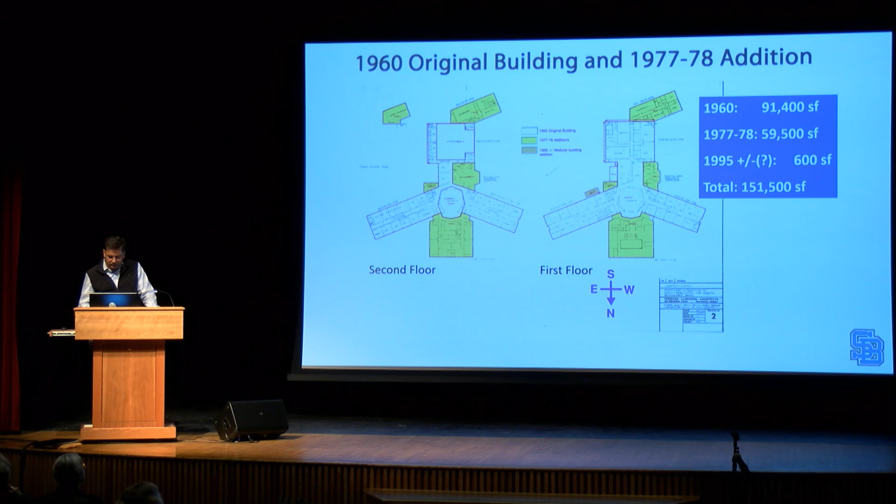Most of the infrastructure systems are expected to last 25 to 35 years, and both of these buildings are over 50. So taking a look at South Burlington High School, it's got about 151,000 square feet, originally built in 1960, had renovations and additions done in '77 and '78, and we've got about 942 students. The green areas are the additions that were added in '77 and '78, for a total of 151,000 square feet.

As part of this process, we brought through a team of architects and engineers - electrical, mechanical, structural, civil - walked through the site and the building inside and out, took photographs, documented the building, and put together a report. That report you'll find on the district website if anyone's interested. I'm just going to give a brief overview tonight because we've already given this presentation, but this is just to bring everybody up to speed.

Taking a look at the site quickly on the high school, one of the biggest issues is the impact of cars and pedestrians. Here you can see this is a significant issue for buses, parent drop-off, student drop-off, or student parking, and pedestrians.

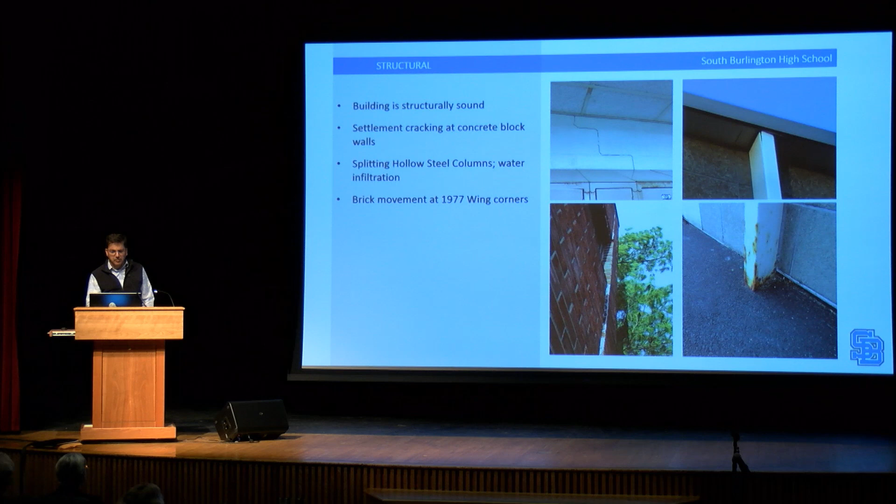Looking at the structural aspects of the building, it's very structurally sound. However, there are areas that are showing its age. There's some brick movement and cracking, and some rusting around the building.

Mechanical systems - the boiler plant itself is about 22 years old, which is relatively young in relation to everything else. Most of the rest of the mechanical systems are original to the building.

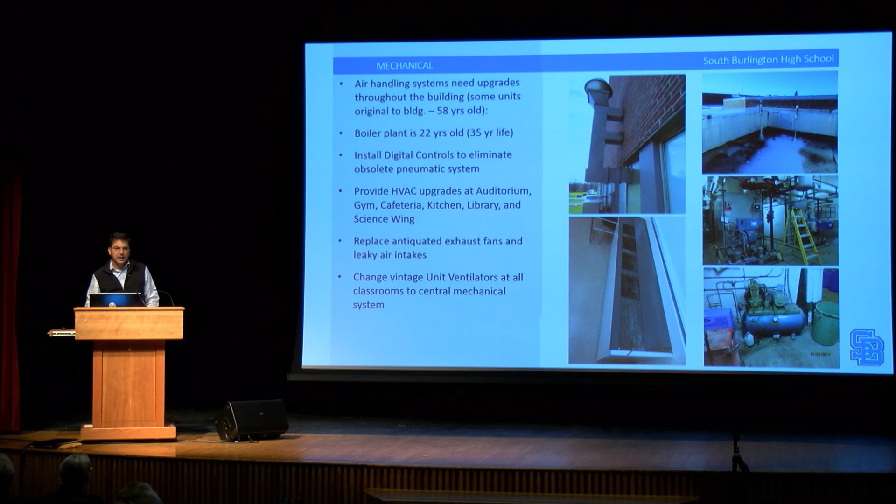The controls for the heating system, this lower right-hand picture, you can see this is a pneumatic compressor. So that is controlling the heating in the school. As you can see, it's antiquated. I think there's one guy in the state that knows how to repair them.

Plumbing and fire protection: in 1977, they added a sprinkler system, but they only added it for the additions. So the entire 1960 portion of the building does not have a sprinkler system.

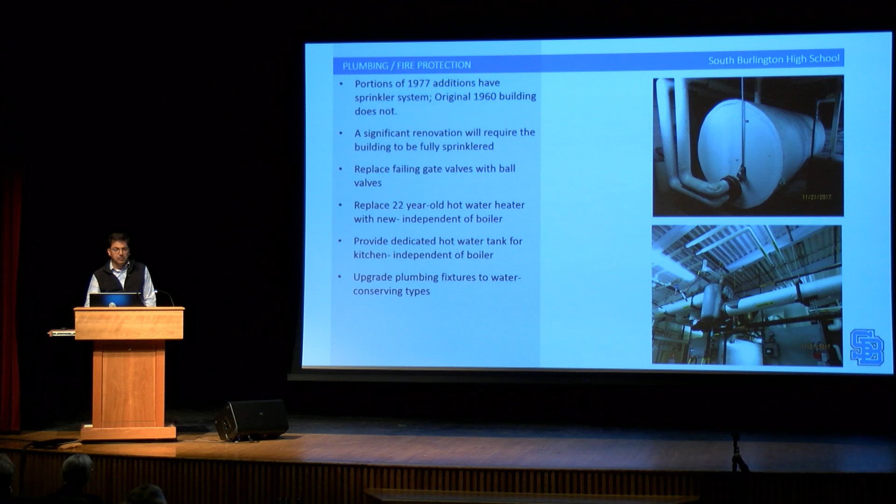Other items include this extremely large hot water storage tank. It's very inefficient, should be replaced. And all the plumbing fixtures should be updated for water conservation.

Taking a look at the exterior portion of the building, the roofs are in need of replacement. The school's been replacing small segments at a time, but there are large areas that are still in need of replacement. Back in the 60s, these were designed as flat roofs, so there's significant ponding.

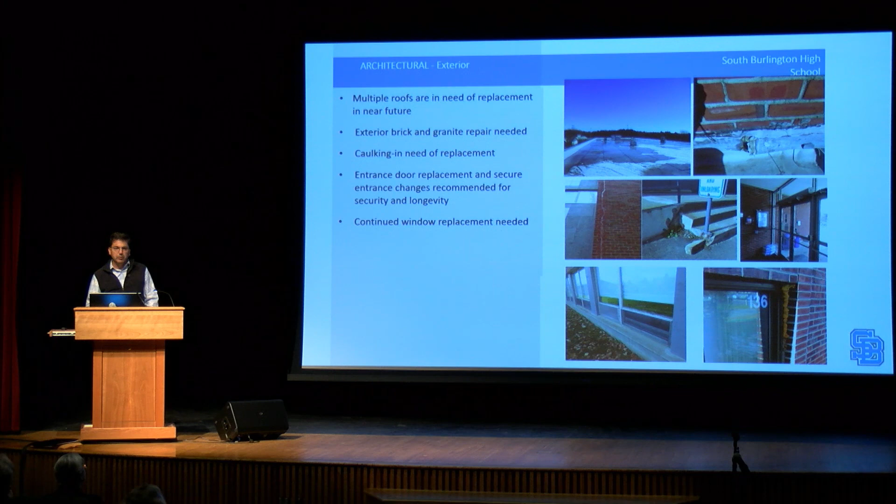Many of the windows have been replaced, but there are also many more windows that are still in need of replacement.

Going to the interior, as you can see, much of the flooring is all original. We've got concerns with handicap accessibility throughout the building, from here in the auditorium to the band room, toilet rooms, the lab casework, and the science labs are all original.

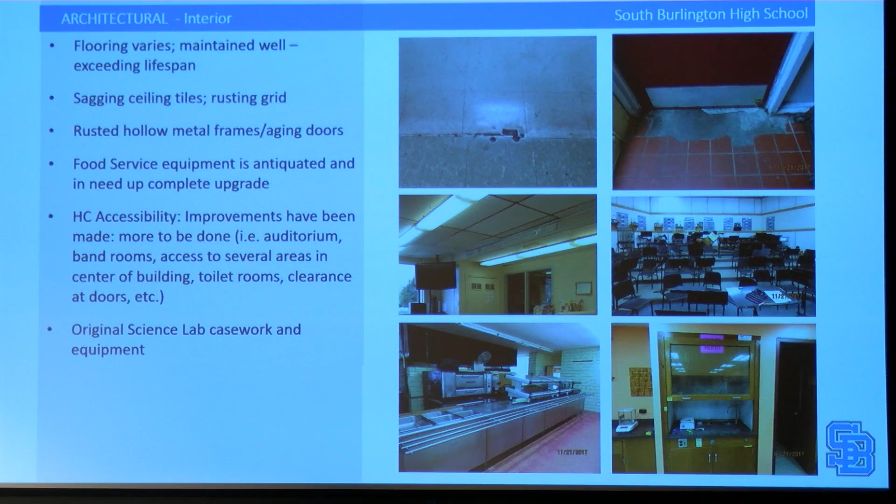Moving on to the Tuttle Middle School, it's about 120,000 square feet, built in 1967. There have not been any additions or significant renovations over the last 50 years.

And here also, there are site concerns in terms of safety for pedestrians. So we've got students and other people parking here, students traveling back and forth from the middle school to the high school, going across this parking lot, which a lot of times feels like a raceway. When cars come in here, they just come down and drop off or park. Then you have buses going around here as well. So you've got all this vehicular traffic, meanwhile students and other people are trying to cross over.

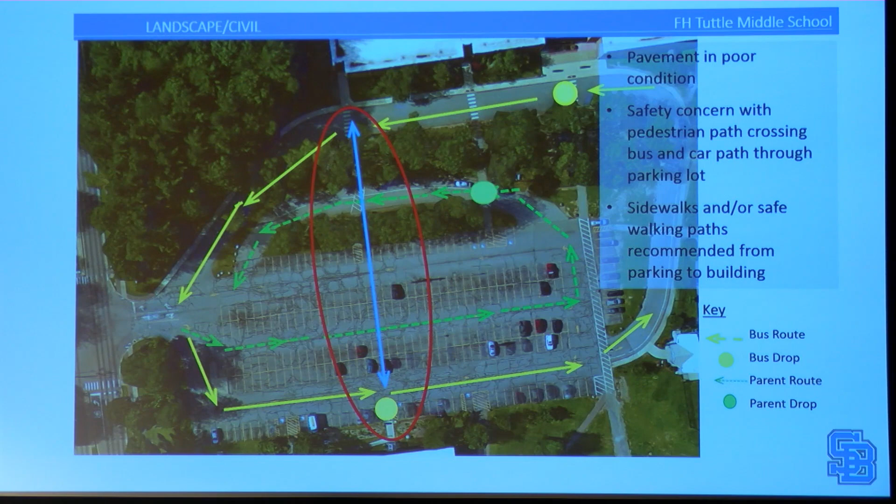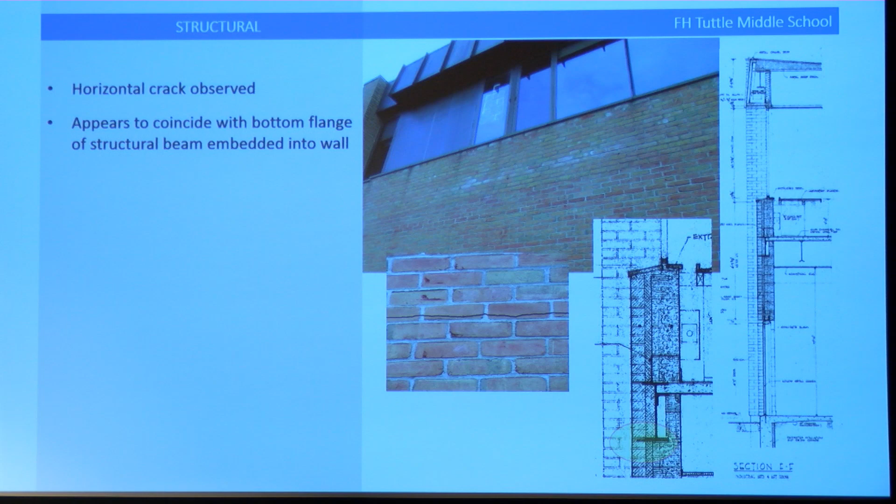Structurally, again, the building overall is very sound, but there are signs of age. There are a number of conditions like this one where there's horizontal cracking observed due to freeze-thaw action. A number of other cracks - nothing structurally significant to be concerned about, but it is showing its age, and there are areas that need repair.

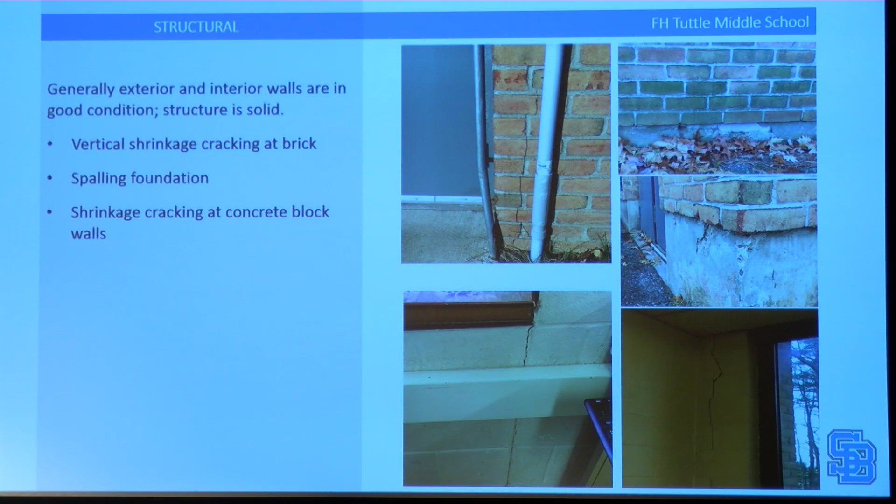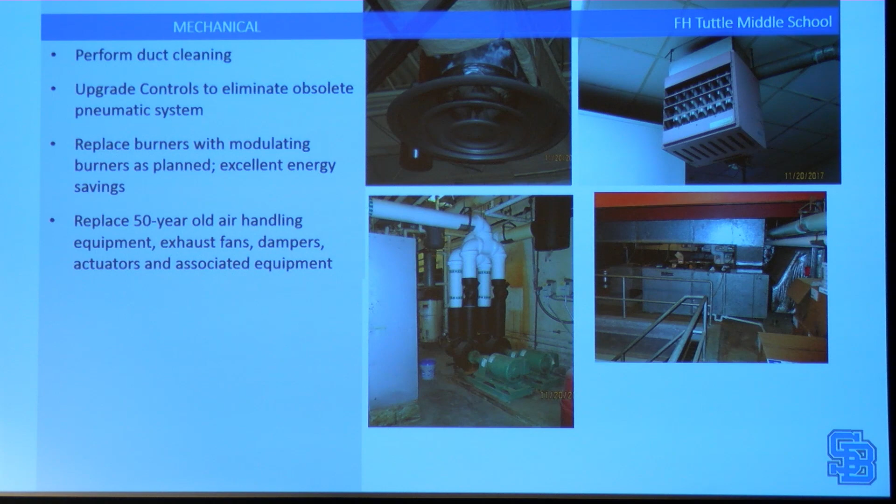Looking at the mechanical system, similar to the high school, many of the systems here are original vintage. Some parts and pieces have been replaced over the years as they have failed, but building-wide, it's in need of complete replacement.

Plumbing and fire protection: there's a limited area sprinkler system that serves the boiler room and the storage rooms, but the rest of the building is not sprinklered. And again, much of the plumbing systems are original.

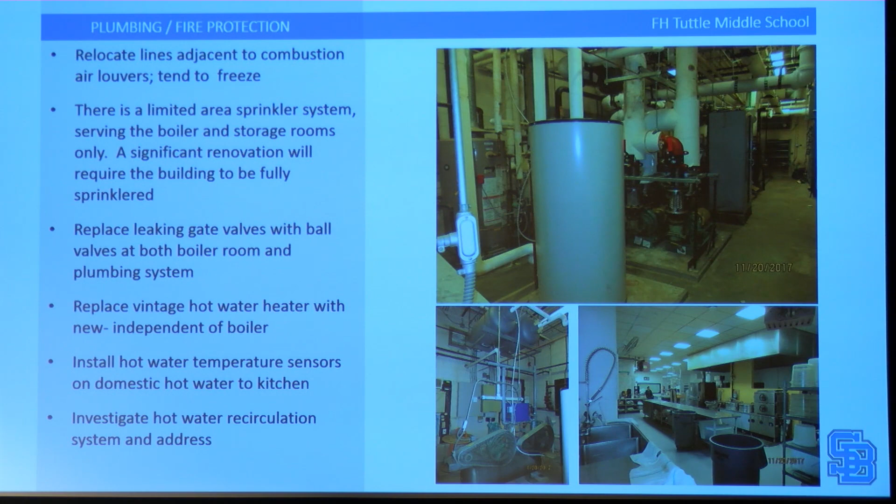Looking at the exterior, this roof is what's called an unreinforced PVC roof. It's way beyond its lifespan. There's some significant shrinkage and pulling away of the roof. You can see over here and over here where it's starting to crack the brick. So these are things that really are in need of upgrade and repair.

All the windows are original as well.

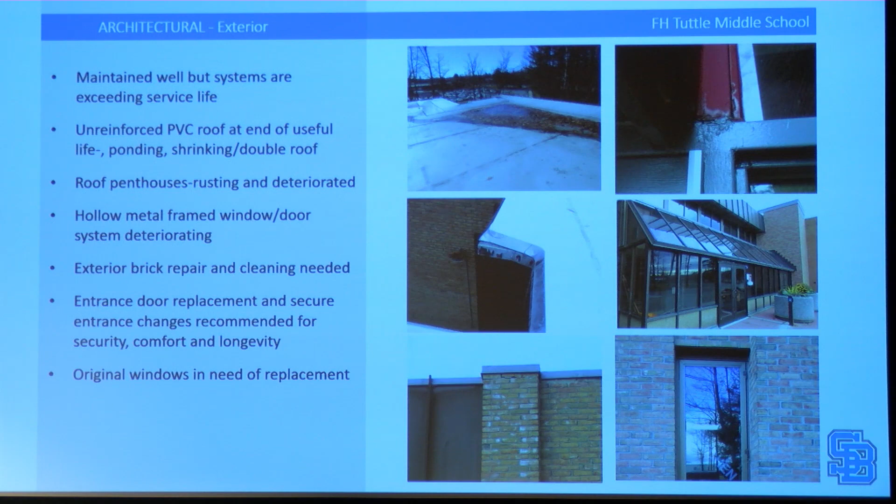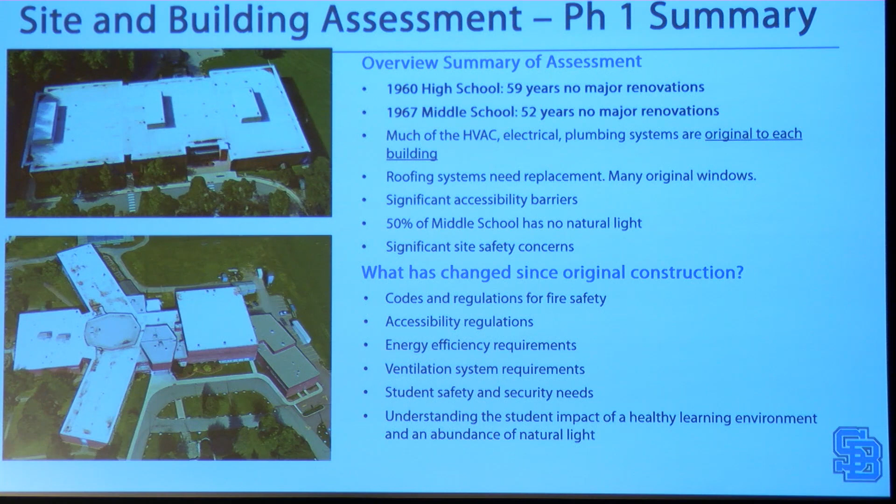So just giving a summary of this, the high school's just about 60 years old, middle school is 52. Much of the HVAC, electrical, plumbing systems are original. Roofing systems are in need of replacement. One thing I didn't touch on, which we will talk about a little bit later, is that 50% of the middle school does not have any natural light. It's a very wide building, and that has an impact on student learning.

And what has changed since the original construction: codes and regulations, accessibility, energy efficiency, ventilation, student safety, and just understanding the impact on a healthy learning environment.

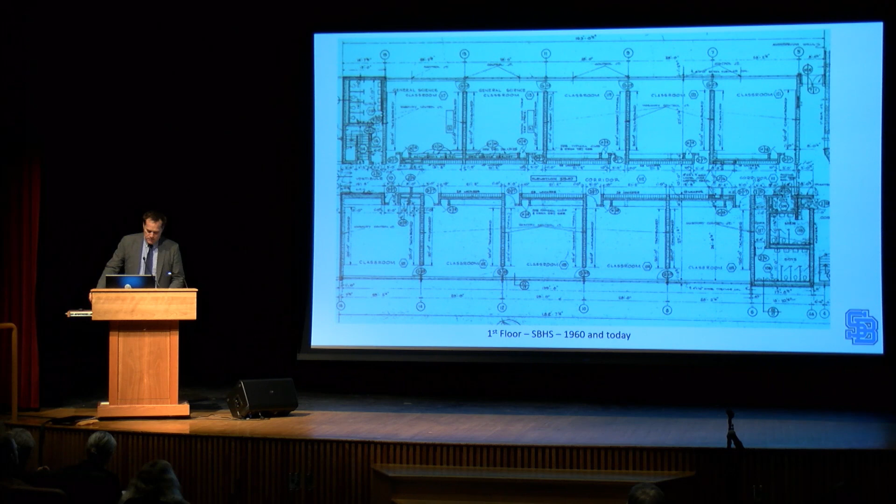The 19th and 20th century model of education was fairly simple. The teacher held all of the knowledge, and the students were like empty vessels to be filled with this knowledge. The teacher would stand at the front of the classroom and write at the chalkboard or lecture in order to impart this knowledge. The students would sit quietly in straight rows, receive the information, and try to record it in their notebooks so they could repeat it back on the day of the test, hopefully in the exact same way that the teacher presented it.

Today, two decades into the 21st century, we know that this approach is obsolete, even though we still work in buildings and classrooms from the industrial model. The skill of rote memorization, followed by regurgitation of information, is not enough for our students to be successful. So straight rows of desks with the teacher lecturing from the front is simply outdated.

Now that each of us can access nearly unlimited amounts of information from the phones in our pockets, what students can actually do with information has become much more important than simply receiving information and repeating it back on a test. We've also learned that for our students to be college and career ready, they need to be better collaborators and communicators. These are the skills that top colleges and employers keep telling us they're looking for.

These transferable skills will help our students successfully complete college, hopefully in 4 years, or as they move from career to career. These skills will also serve our students well, even as many current professions disappear, while automation and globalization reshape the workforce as we know it.

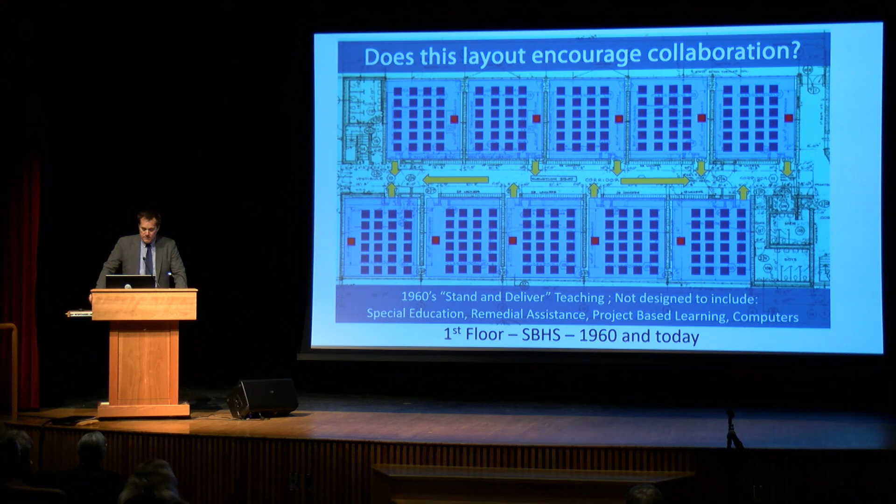Teachers and students are doing the best they can to make these shifts in learning and teaching, but our buildings don't lend themselves to this new curriculum. Whether we look at the design of our classrooms or our buildings, we're still literally operating within the box, with one-size-fits-all space limitations. We will soon be 20 years into the 21st century, but we're still working in spaces for a 19th century model of education.

We know today, based on the last 50 years of nationally recognized educational assessments and brain research, that each student is different in the way they learn, the way they think, and the way they perform best. Looking forward to the next 50 years, if we're to expect our students to compete with other students around the world in both college and the workplace, it is our responsibility to create an educational learning environment to support flexible, collaborative, inspiring spaces for students to learn.

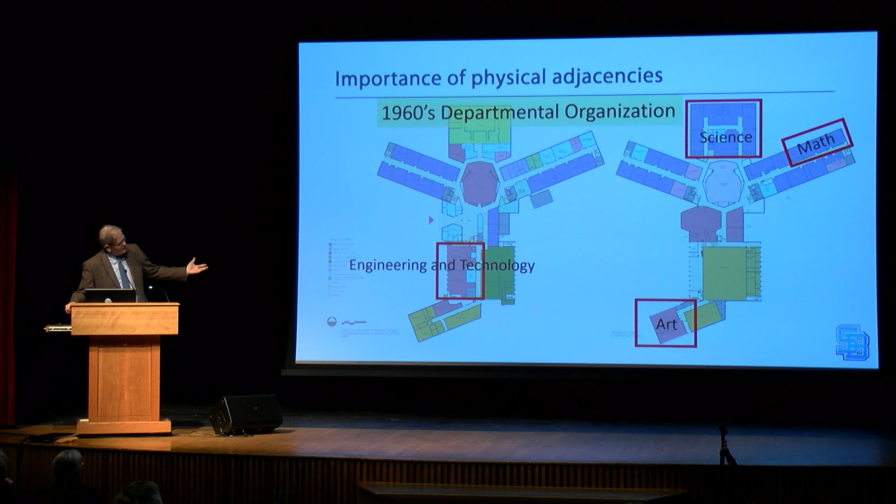That equipment is most often housed in the engineering and technology section. And so again, this is just a graphical representation of how disparate and spread out all of these are. Now this is an actual, you saw this slide before Mike Martin put up, this is actually our school.

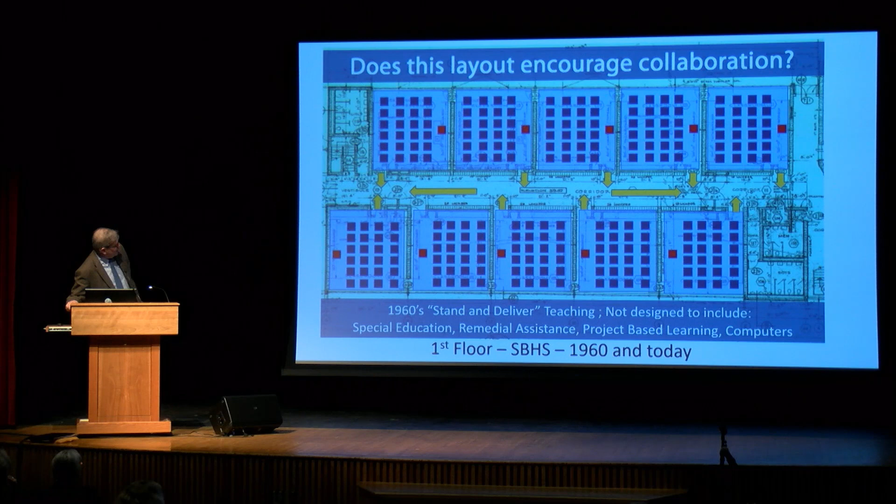These are like the original blueprints. And so this, I believe, is what the students will commonly refer to as the math wing, which of course, as you know, means we also teach science and health and history in that area. So, this is just a classic representation of those boxed classrooms. And so this is like what it could look like. And the ELA,

the shaded green areas, that represents extended learning areas. That's what ELA stands for there. And so there you see where you may have a couple of science classrooms, a couple of math classrooms that feed into these extended learning areas. So a teacher could very easily have students working with each other on a math science project, with students from another section or another class in that extended learning area. And also, we would continue to maintain that kind of passive supervision that I was talking about before.

There's actually a local example of this, and some of the slides that you've seen have been from the Shelburne Community School. I visited the Shelburne Community School last year, observing a teacher candidate for a position here at the high school. And so I saw it not only in the pictures, I saw it in action. And what they have been able to do is really create these very pliable spaces for their students.

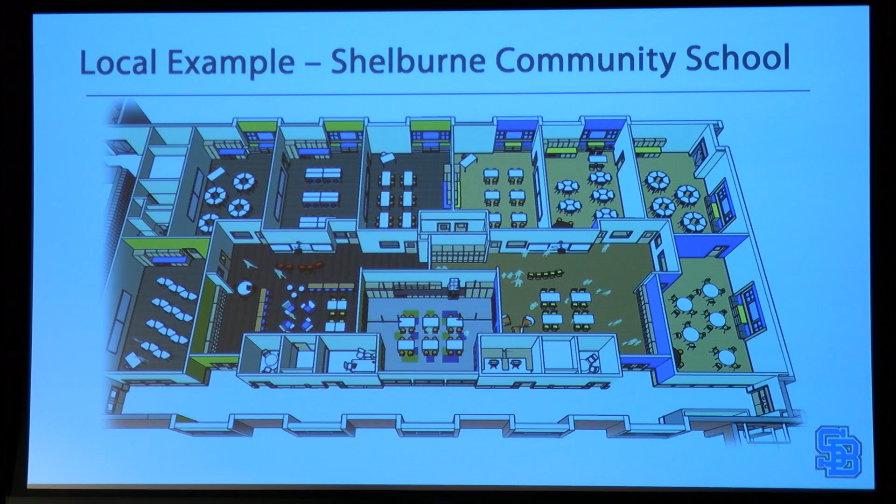So at times, you would see the teacher presenting some material, students kind of working in groups, then boom, they would go out into different parts of the wing or parts of their so-called house where they would be able to work independently or collaborate with others.

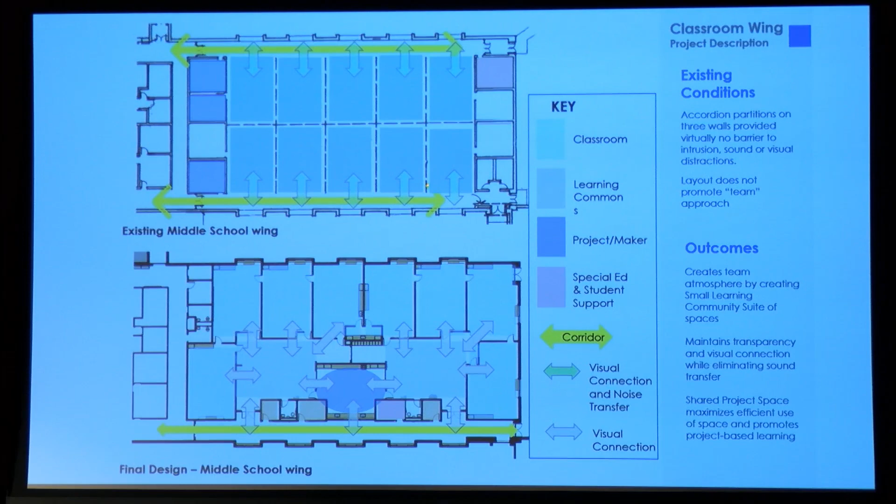This top depiction is the existing middle school wing, and so there you see it's kind of like your classic hallway down the outside, and then classrooms on the inside. And so you can imagine very little collaboration is happening in that environment. And then in this environment here, you have on the bottom, which is a

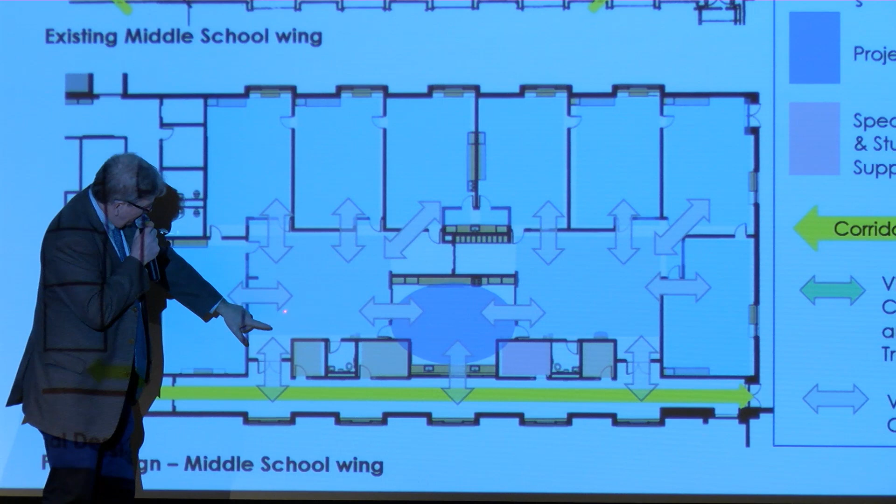design of a middle school wing. You see where students would walk in through this one area right here. So students would walk in, and now they're in this house area, and these classrooms can all be accessed from within this house, and then same thing over here. So if you can imagine a team setup, that's what

a better design or a more progressive design for what we are actually doing at the middle level in South Burlington.

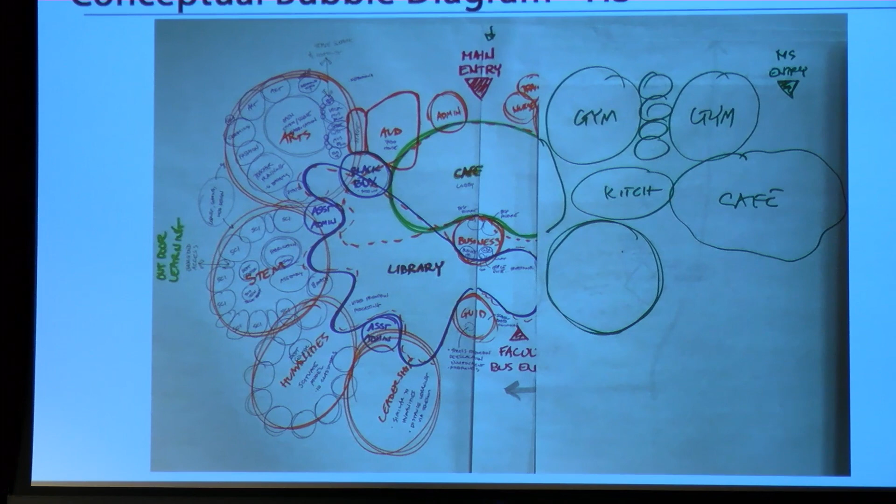It's not so much in teams, as we're kind of developing almost thematic academies where we're putting related programs close together. So we have an arts wing. We talked about STEM, science, technology, engineering, and math, trying to get those related programs closer together, a humanities section, and a leadership section. The library kind of looks like a glove, we want it spread out so that information source is available to all of those teams. A cafeteria kind of integrated into the heart of the school, something that doesn't look anything like we have today. We really want to deinstitutionalize that space.

So this is where we started from, and then we try and take these bubble diagrams and start translating this stuff into more conceptualized plans that I'm going to get into. And we have to figure out how to evaluate these plans.

So what the working group that was established for this phase 2 process, there's 7 categories that we're trying to match up these options to. Education, how well they serve the future education. Are the options student-centered, and are they going to support wellness and support the faculty and collaboration? Are we fixing the issues on site and circulation and separation of pedestrians and vehicles? Is there good community access? Sustainability - all of these buildings, when they're either renovated or new construction, we want to make sure they're energy efficient and healthy buildings for the occupants.

And we really needed to look at, and this is an important piece, if we were going to do something, how do we build these? And how do we keep the schools up and operational on the sites while we're doing that? And certainly cost is an important piece. How does that relate to all of these different options?

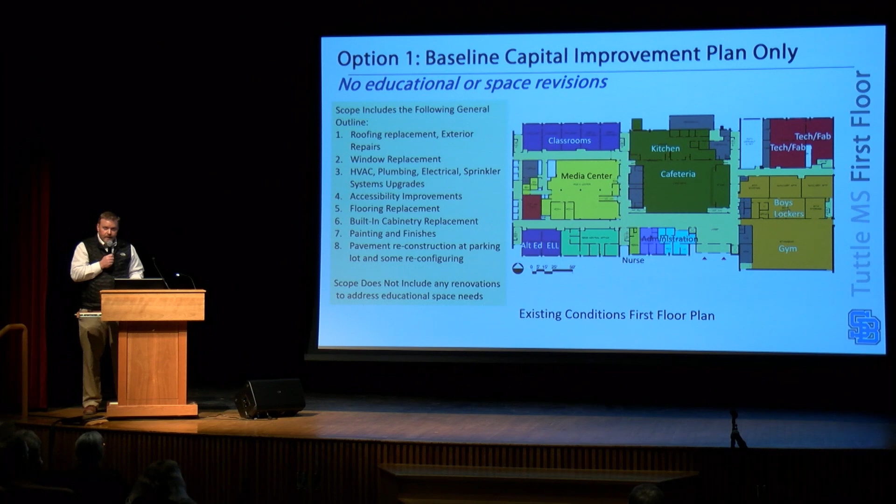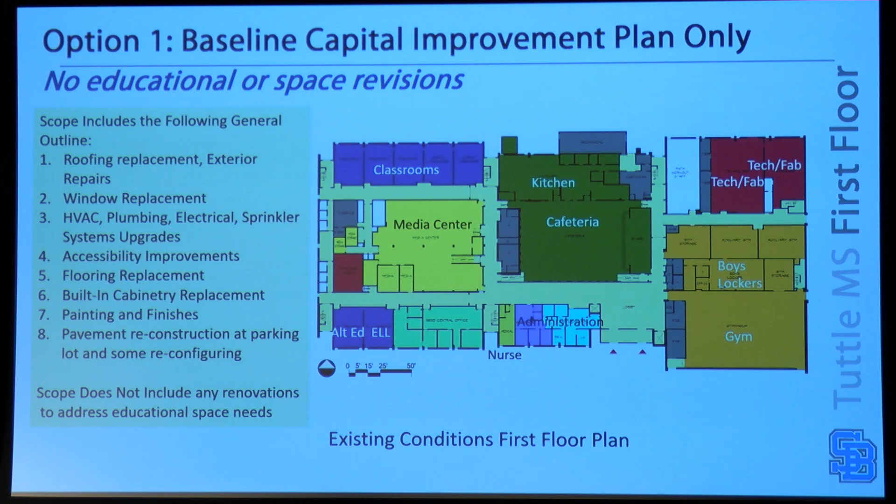So for the middle school, option 1 really addresses the phase 1 that we talked about. We're not making any educational improvements in option 1. This is just how do we extend the life of these buildings for the next 50 years. All of these options we're trying to show you right now are looking for 50-year solutions. So this identifies, I'm not going to go through this whole list, but all the things Rob talked about that needed to be replaced. And when we're all done, you're not going to see a lot of this stuff. You'll see new paint and new finishes, but all the infrastructure is really going to be behind the ceilings and the walls, and we're not moving any of the walls around to improve education.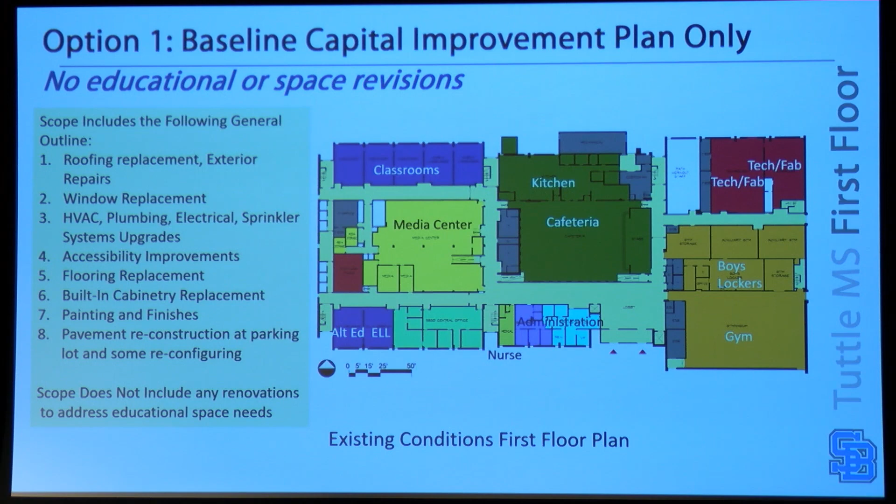This is the first floor. The second floor, very similar. Right now, science is all clustered together. Originally, this was designed as a junior high model, so it kind of looks like a small high school from the 60s. Classrooms are clustered together. Not all of them are the right size right now. Art is way over in the corner of the building. Band and chorus are separated, with locker rooms upstairs and downstairs for the gymnasium as well.

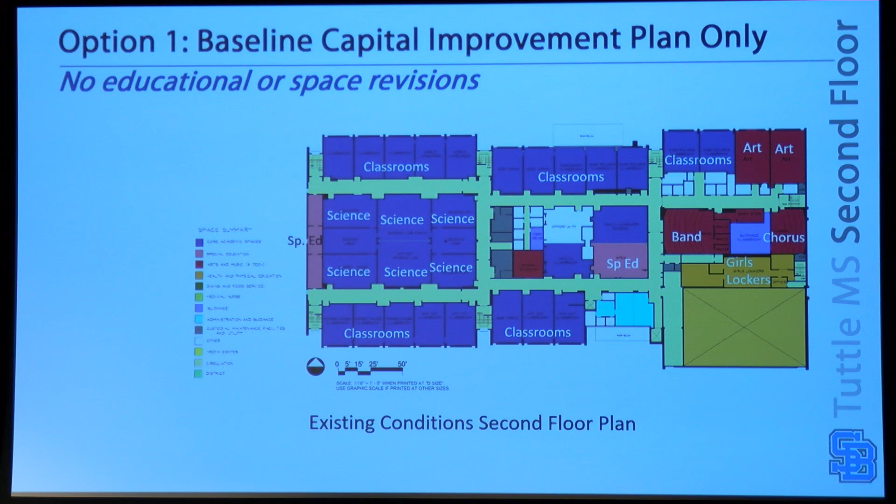How do we approach building something like this is really important, because we can't leave the students in the space while we're renovating it. There's no swing space foreseeable in the district where we can take 700 kids and move them somewhere for a couple of years. So we have to actually build this while the students are in the school.

This takes a long time, could take upwards of 3 years to complete. One of the big problems is that the money spent creating that portable village of classrooms, which has fire alarms, ADA access, heat, power, fire alarm and security systems, all that money drives away at the end of the project. So we really need to weigh the cost of temporary facilities that you don't get any benefit from. Is that a good, viable, long-term solution?

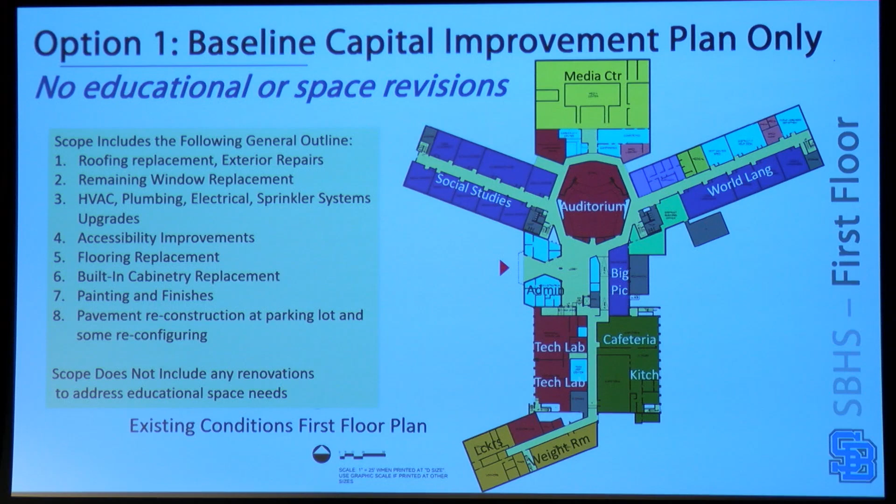At the high school, it's the same deal where we're just replacing the infrastructure issues. We're not changing the floor plan around at all. Again, we run into some of the same issues here. This is the second floor, keeping everything in the same place. It's still departmentally organized. How would we build something like this?

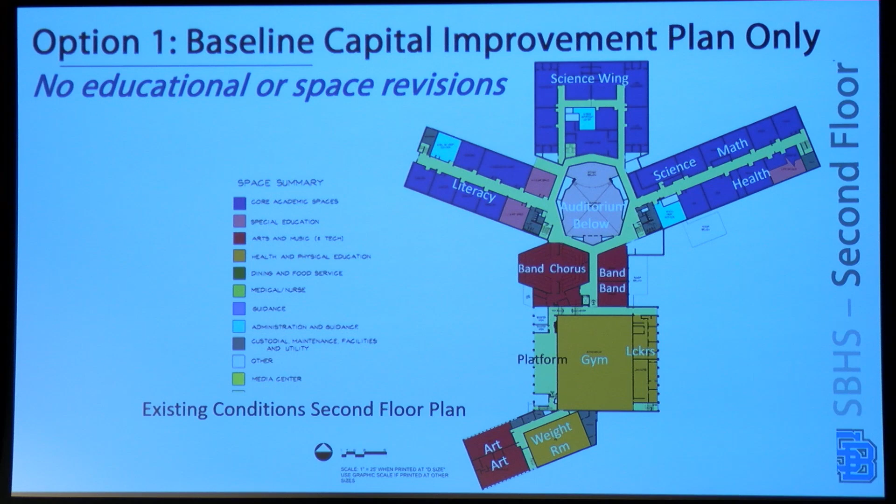Option 2, we take care of everything we just talked about in option 1. But what we wanted to do here was start to address some of the educational issues. This is a representative example. We chose the top 3 priorities at the middle school that were identified for us: the team's geography, the relation of the classrooms to one another, the cafeteria zones, trying to deinstitutionalize that space and make it more multifunctional, and there's a lack of gym space at the middle school. If you've been in there trying to watch a game, there's really no room outside of the court.

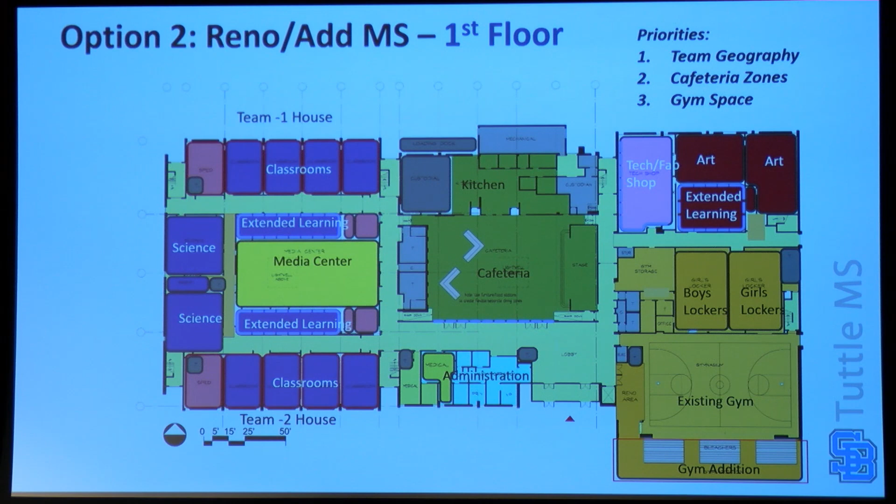On the second floor, you can see again you're starting to see some pretty good identity related to the teams, where we've got science and related classrooms for grades 6 through 8.

The science block that was here, you can see that we've blown that apart. There's that opening in the roof to try and get light down to the media center, and also to these extended learning areas around it. Same in the middle of the building, here's another light well trying to bring light in.

We renovate the band and chorus rooms. Right now they're separated by the guidance room, which we move across the hall, creating a health and wellness area with an extended learning center as well. Where we displaced the girls' locker room upstairs, we've added a movement studio as part of the program.

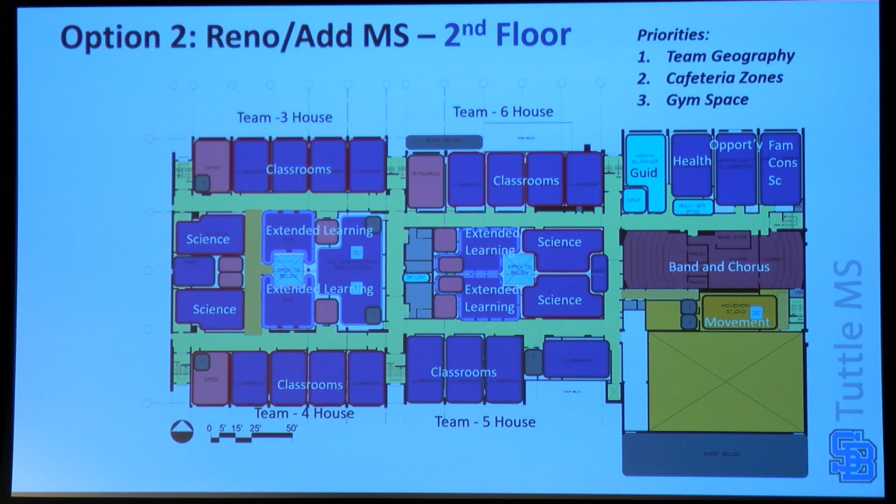So this is taking a longer step into solving some of those educational issues, but it certainly isn't solving all of them. We have the same issues because we're not creating a lot of new space to move students into.

We're going to run through the similar scenario for phasing. Again, it's building those portable classrooms and rotating students through, and this one is a 2 to 3 year construction project.

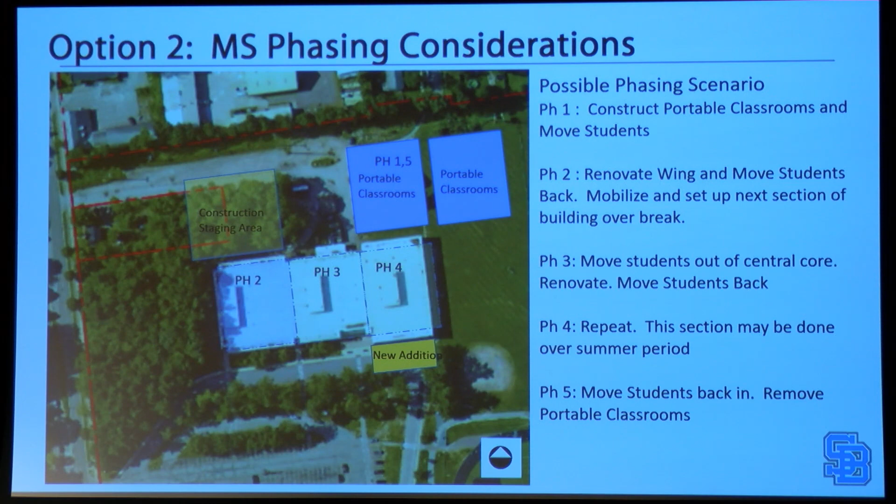The science department needs a complete overhaul. It's something that's been cited in the NEASC reports as well. And gym space is inadequate, we need more square footage to support the current programs.

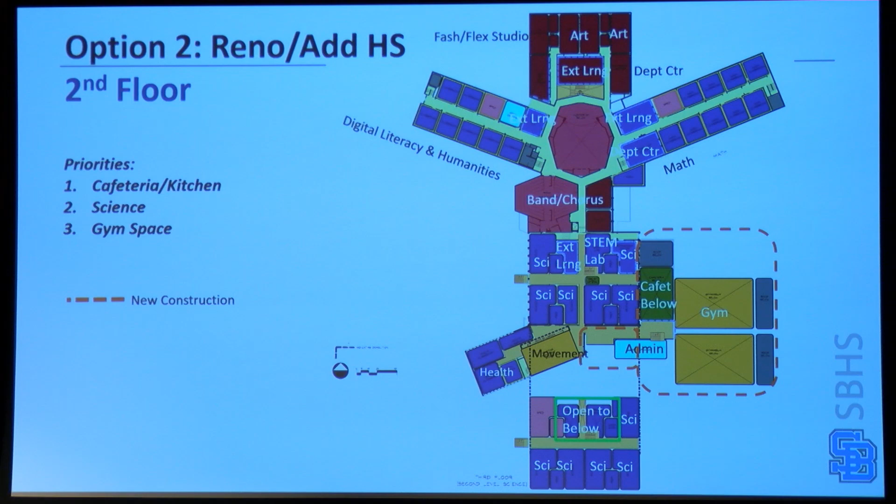From a site planning perspective, this is a different picture on the site circulation than what we have now. Here is the main entrance, now on the south side of the building, Kennedy Drive, Dorset Street to orient us. The old football field has been turned into parking.

We've closed off one of the curb cuts here, so we come in from a bus drop-off standpoint. Buses come in, they loop around, drop off at the front door, and then they can loop around and continue without going back onto Dorset Street, which they have to now, and come within the campus to drop students off over at the middle school.

Rob had mentioned what happens in the existing parking lot, because it's actually oriented 90 degrees from what we're showing right now, and it's almost like a speedway drive-through. So we've tried to slow people down, and we've changed the orientation of the parking lot.

Parent drop-off is just coming through where the light is. They circle around, drop off at the front, and they can come back out. So separation of buses, separation of cars. We've created some access for pedestrians to go back and forth because we know how much they do that. And this satisfies Pat's paving the north parking lot question.

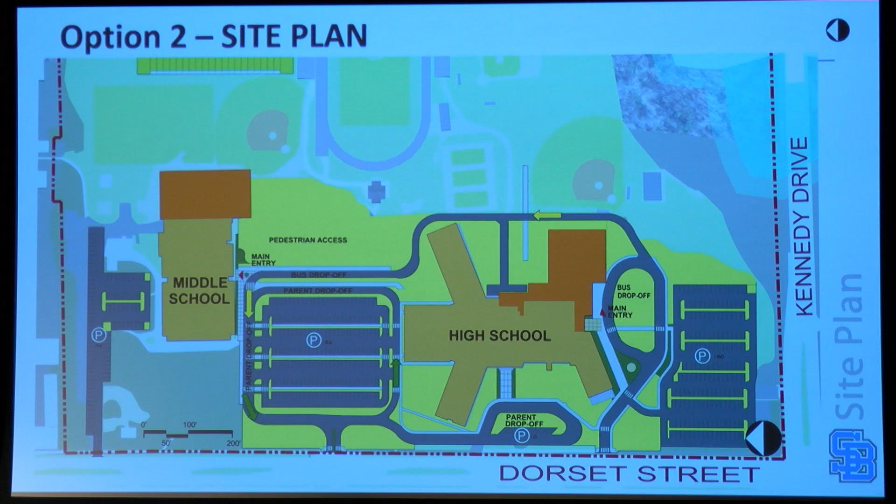Option 3, we're even going to go further. In option 3, we're trying to address as many of the educational needs that we identified in phase 2 as we could. And again, this is a renovation addition project.

The differences here, we'll start, this line right here is where the existing entrance to the gym is. What we're proposing is to take that gym completely down and replace it with a new addition that has larger gym spaces and a related performing arts space that has access, so you can have band, being able to have practice in a performance space here.

The cafeteria floor plan is rearranged a little bit. There's a large platform that also has access both to the cafeteria and to the gym, depending on what type of function is happening. The big change here is we're really trying to envelop the lower floor with natural light. So we've created some large openings here.

This is called a Hellerup stair, and I'll show you a picture of what that looks like. But basically, it's stair paths on both ends, and in the middle, it's tiered seating that goes down. And we're finding, because we've done a lot of these now, that it's a really good way to deinstitutionalize the space and provide many different opportunities for students in an eating environment.

And also from a teaching and learning perspective, it becomes a multifunctional space. You can have large group presentations in there.

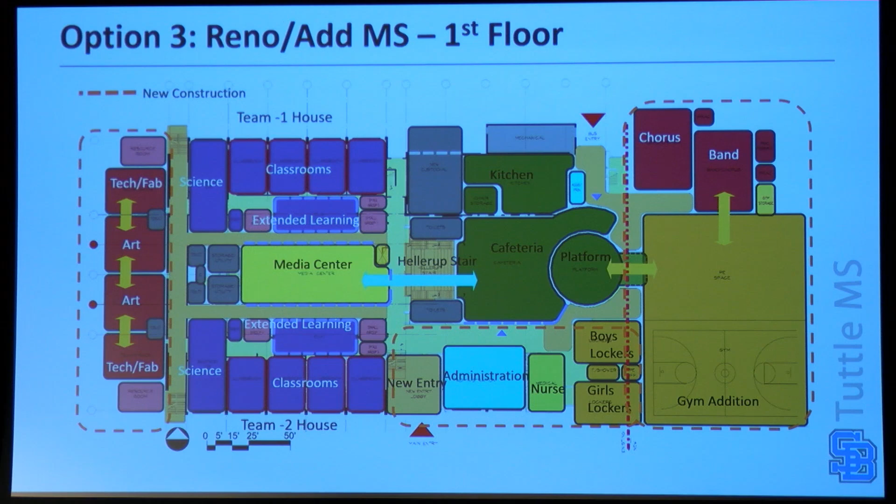When we go up to the second floor, you can see what we've done is we've actually taken away all the square footage that is here. So this would be wide open to skylights that are up on the roof. So it's bringing all natural light down that whole area of the media center.

And we're doing the same over here on the cafeteria, so it becomes a 2-story space. It's going to get lots of light and solve that problem of getting light deeper into the building.

Again, classrooms are arranged the way we're looking to do it in the future. We've got related special education and breakout spaces, some rooms for moving some of the administration assistant principals up to the second floor so they're closer to the students and staff that they're serving.

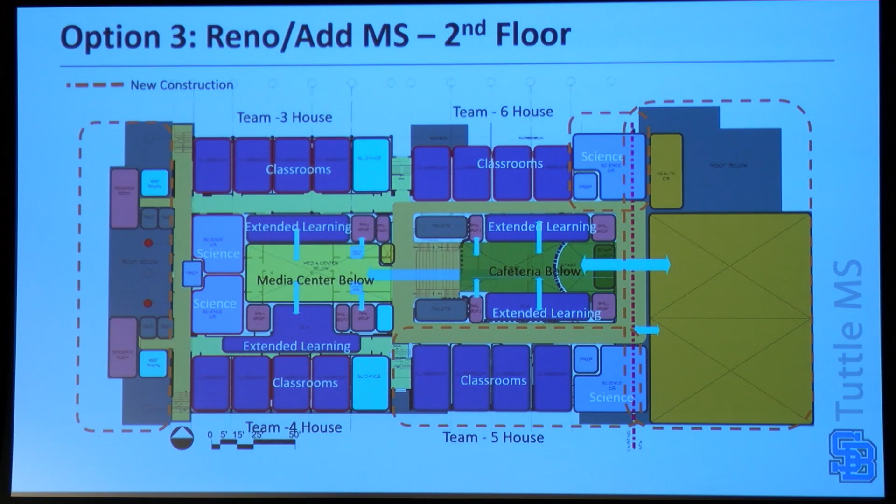At the high school, the renovation addition piece of this is a little bit bigger. So this is the existing front door. Basically, we're going to take right where the stairs are that you go up here off the lobby to go up to the gym. Everything south, we're proposing to take down. So this is all new construction in this area here. And what we're replacing is, you've seen the gyms here before.

We've got associated weight and movement studios, a kitchen and cafeteria, a black box theater. An auditorium is about twice the size of what we have right now. I think we're just under 400 seats, plus or minus, in here.

What we're proposing is an auditorium for 750 seats, with all of the related program spaces: a scene shop that has access to the stage, theater tech program, band and chorus also right next to where they'll be performing, some flexible studio space, and again we're separating a new entrance for drop-off of buses and where parents will be dropping off. We still have the same problem, because this is all existing building, of those undersized classrooms.

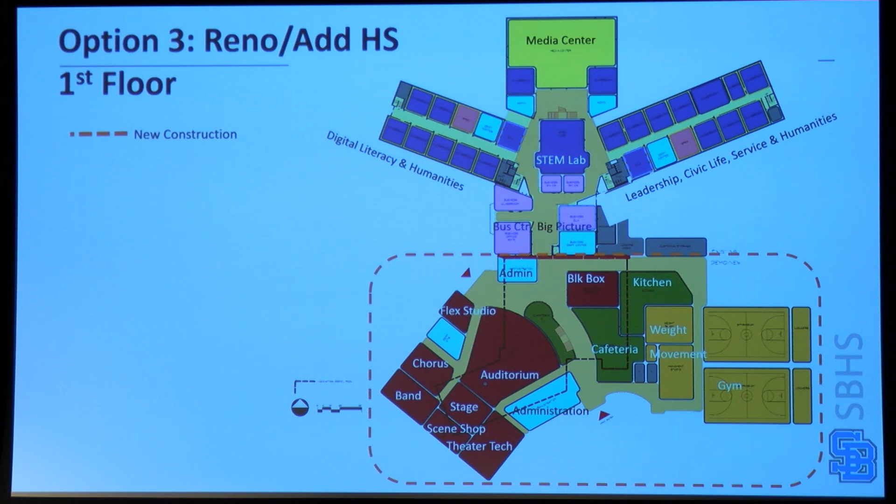The media center stays where it is. The auditorium, where we're standing right now, we actually flatten out this floor, and we poke holes in all of the outside places so you can actually see out and what's happening. This becomes a STEM lab or fab lab, and we saw some of those pictures earlier, where we're trying to integrate all of those places and provide project learning space for those related programs.

On the second floor, again, we are renovating the science wing. Where it is now, it's got extended learning areas, completely revamped science labs. We're getting related programs closer together, so you have math and science next to each other. This STEM lab is open to below, so when you're upstairs you can actually see what's happening on the floor level. Health program together, and again we've got art on the upstairs floor, kind of where the performing arts is, and these have overlooks down to the cafeteria and the black box theater below.

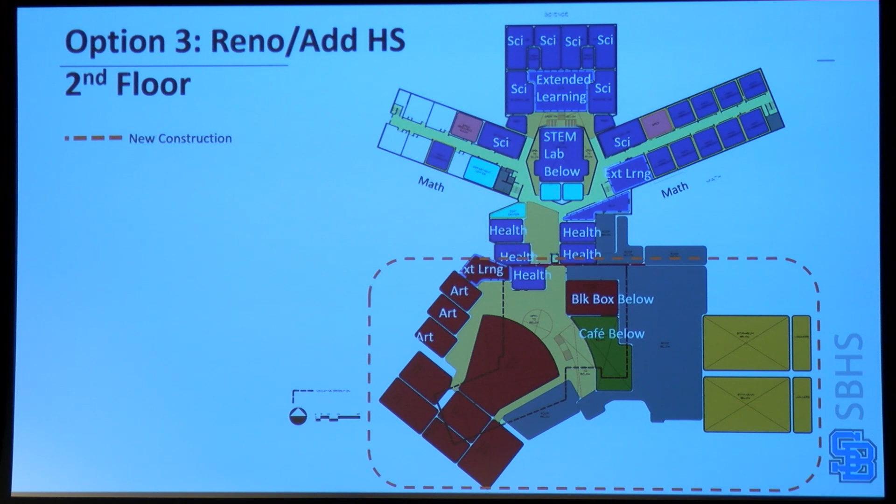What this looks like on site planning is pretty similar. Obviously the additions are a little bit different. There's additions here at the middle school for the arts, and here's the gym addition. The high school, it's a much larger addition, but the orientation of the circulation is pretty similar to what I just showed you.

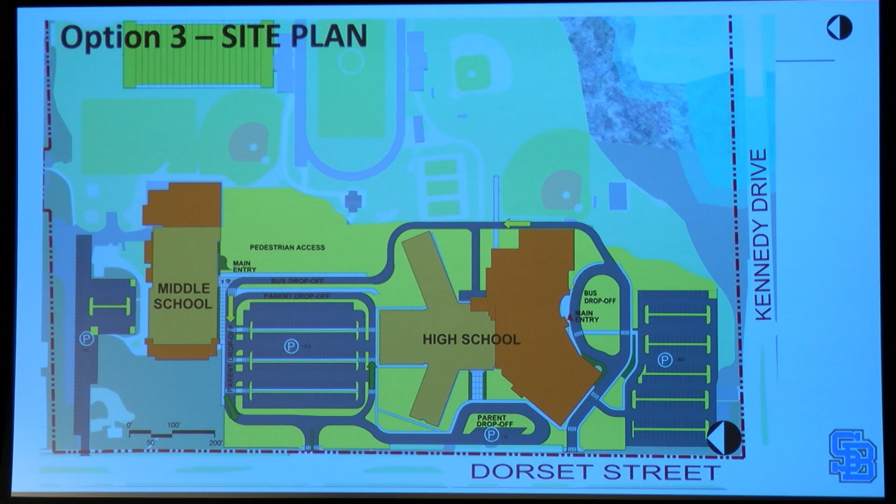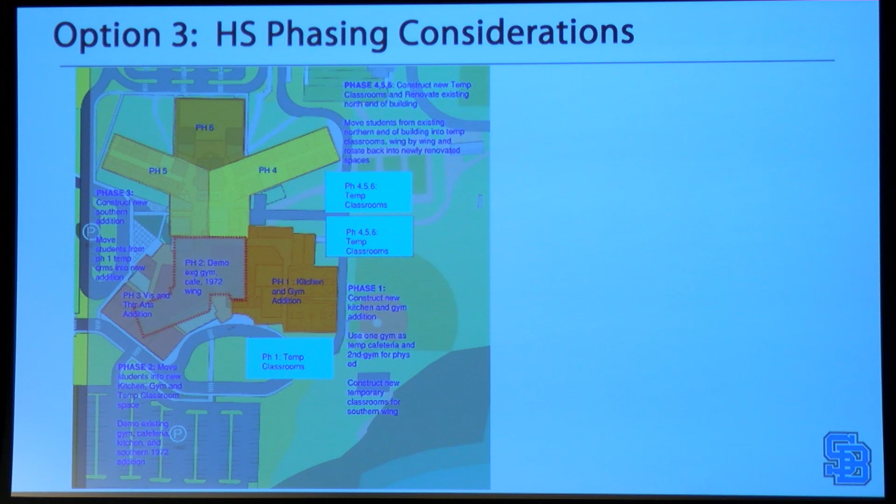Option 4 is basically what I showed you, but one of the questions that was asked is if there was ever consideration of having to move the 5th grade up, so it became a 5-8 middle school, how could you accomplish that? Could you fit it on the site, and could you tie it in with the 6th through 8 program I just showed you in a previous option?

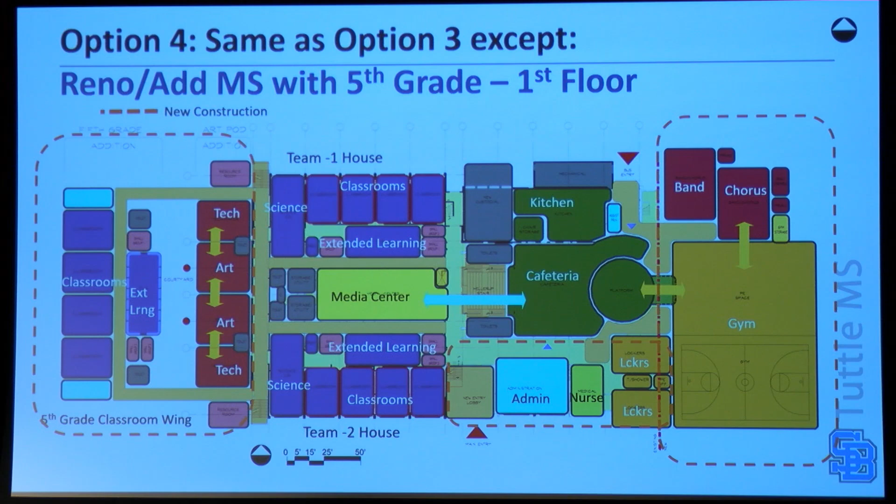And the answer was quite simple: yes, we can, just by adding another 2-story wing off of that. That could be a 5th grade classroom wing. And again it has all the same features: extended learning, breakout spaces, and special education spaces, and it fits on the site. That's really what we were trying to test.

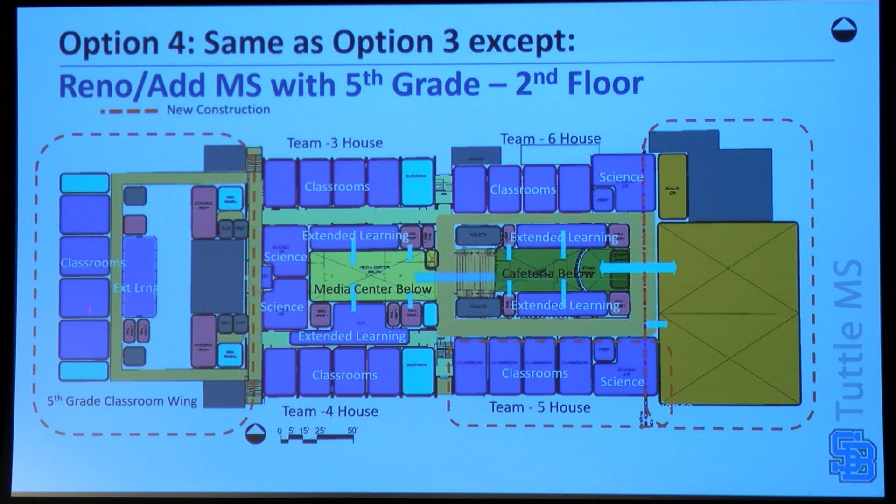Upstairs, it's the same as the previous option I showed you below, but here's the addition for the 5th grade. So it's just another grade level team that'll be up on the upstairs.

Option 5, what we were looking at here was, we heard a lot about the opportunities that take place between the middle school and high school, and we've got staff and students going back and forth. We said, what if we put the buildings together? So you ran basically an autonomous middle school and an autonomous high school under one roof. There's a lot of economy of scale from a programmatic standpoint, and there's potential economy of scale in operational savings. So this is something that we wanted to explore.

All of these that I'm showing you really were meant to answer: can we fit this stuff on the site? So while these are all very conceptual, we tried to look at these as the worst case scenario of how we would plan, because this is shown on 2 floors. We could certainly do this over 3 stories and make the footprint more compact. We said, from a site planning perspective, what can we fit on the site?

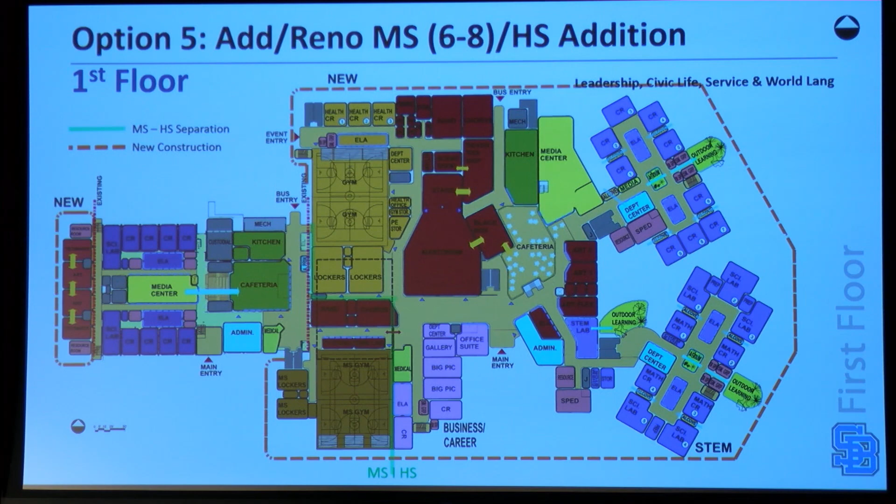This plan is the same as what I've showed you before. So it's an interesting arrangement, it's high density, it has them all together, and that's how that looks on the site.

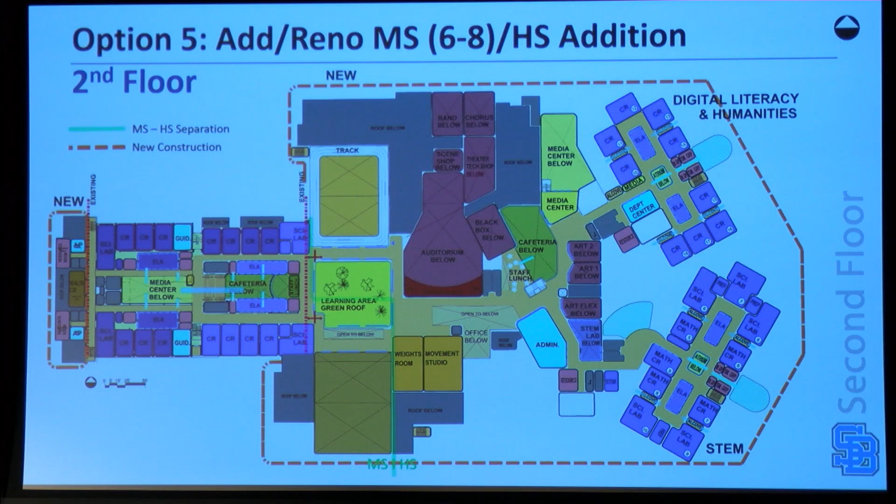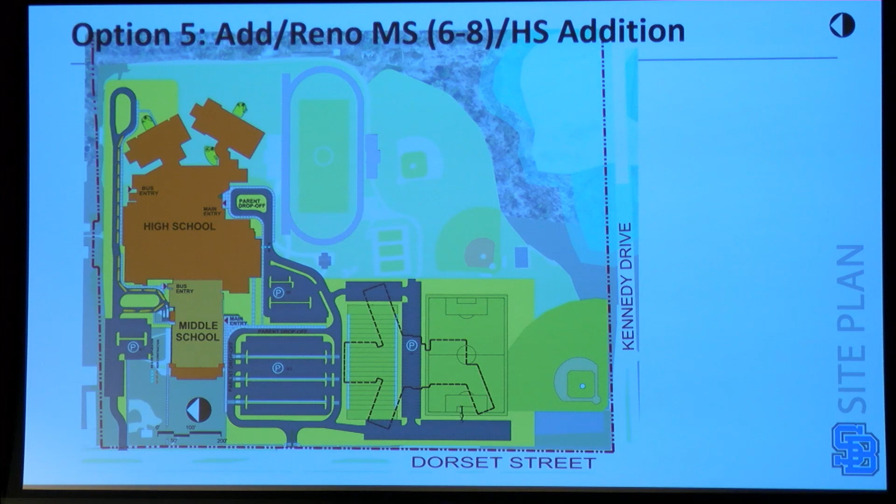There's lots of different ways to arrange this. This just happens to be one.

So this actually decreases the amount of time it takes for us to be able to do this, it condenses it. And time is equal to money here, so we're always looking for opportunities, how can we condense the construction schedule? So this is the best one of the options that we've looked at to date.

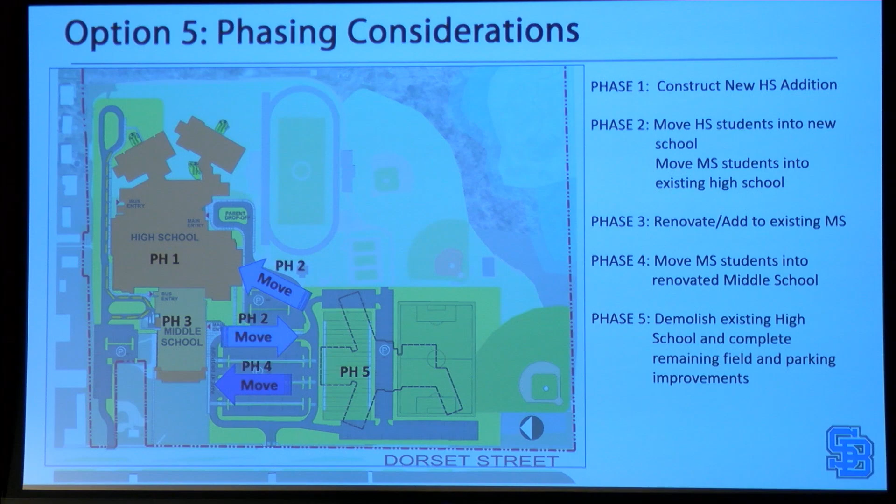Option 6 is looking at a renovation addition at the middle school and a separate new high school.

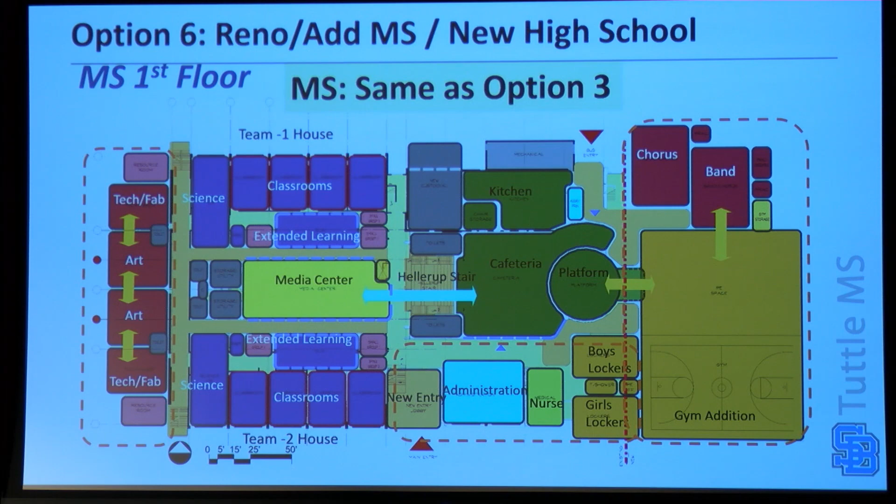I'm not going to go through this again, you've seen this. We have this model of renovated and added-to middle school, it's the same as option 3, and it's the same up on the second floor as well. Here is the high school, and it's similar, the geometry is a little bit different, but all the major components are still there, similar to what we showed you in option 5.

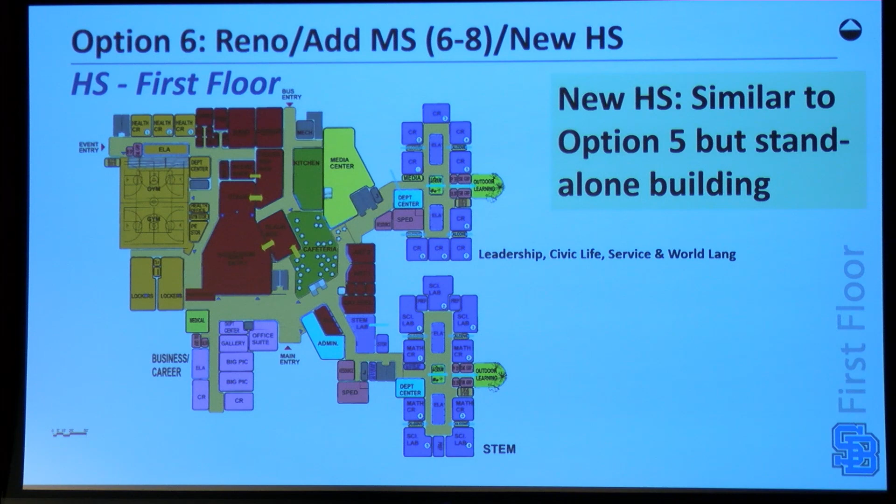But this is separated. Where it was connected before, this was just to explore if they're separated. So the second floor looks very similar. Here's how this looks on a site plan.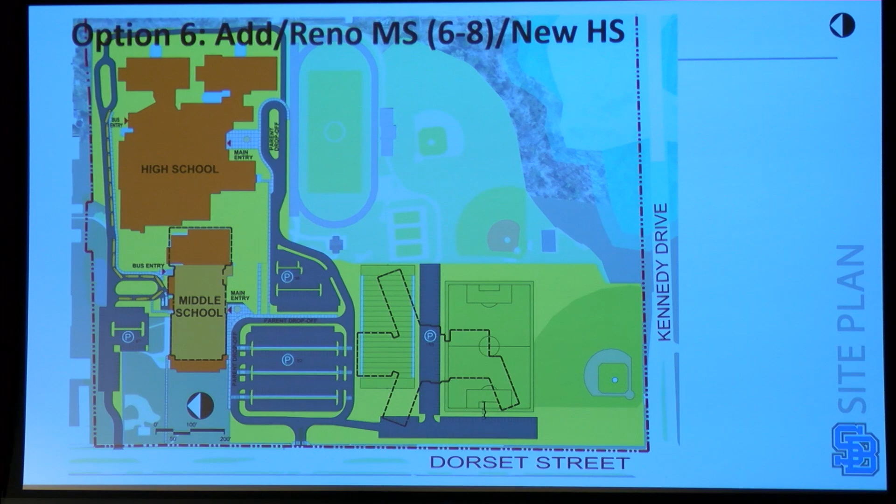When we finished looking at this, we said we're not sure why we would want to do something if they're that close together—there's all these opportunities for collaboration, it kind of makes sense to connect them. But we did want to look at the options, so we're covering all the bases. The phasing is similar to what I just went through for option 5.

Now we move into option 7, which is a new middle school and a new high school, standalone, separate buildings. So we have a completely blank canvas to start with. We really were able to organize this the way we wanted.

So we have grade levels, this would be 6th grade here, where we've got related classrooms, science with them, all of the larger and small spaces kind of here in the center that relate to each of those teams. There's a fab lab or technology project lab in the middle, media center and cafeteria kind of at the heart. Here's the main entrance, administration, some outdoor learning classrooms right off of the entrance to the lobby. Here's a kitchen, mechanical space, a stage platform area relating to the cafeteria for performances. Gym space is down here in this wing.

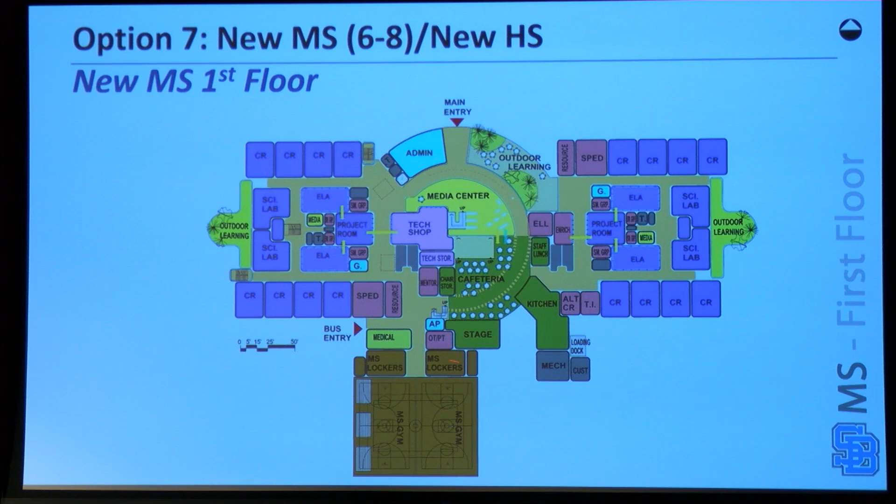This would be 7th grade. Upstairs, similar, we've got 8th grade would be here, similar layout. And then we've got art programs, band and chorus. The media center is actually on 2 floors connected by an internal stair, and administration here as well. So pretty compact, pretty efficient, and it hits all of those kind of next generation learning programs that we were trying to do.

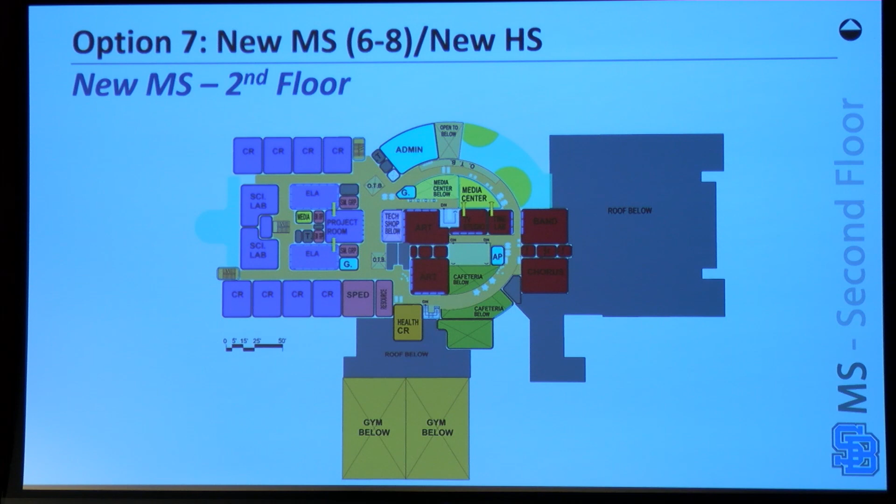Standalone high school, we already had one of those models, it's just where did we put it on the site. So it's very similar to option 6. 2nd floor as well, you've seen this plan before. The geometry and the location of stuff is a little bit different, but essentially the same.

And what we've done here is we looked at it and said, how do we build this in the most efficient manner? So we've swapped places from existing, where you can see now the middle school is behind the high school. Here's the footprint of the high school.

So you can build that clean by itself and keep both middle school and high school up and running. The new middle school is located on the varsity baseball field, again it's separate from the existing building. So you could build those concurrently or one after another, but it's completely independent of the existing buildings, so it's not interfering with the ongoing education day to day. And this would be the fastest construction approach.

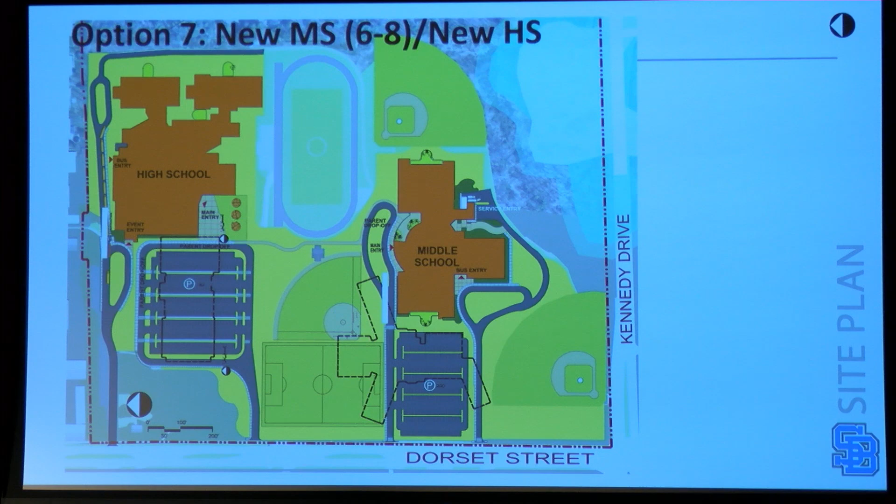Again, the phasing here is pretty straightforward because we're having 2 new buildings: build a new middle school, move those kids in, build a new high school, move those kids in, demo the existing buildings, and replace with parking and fields.

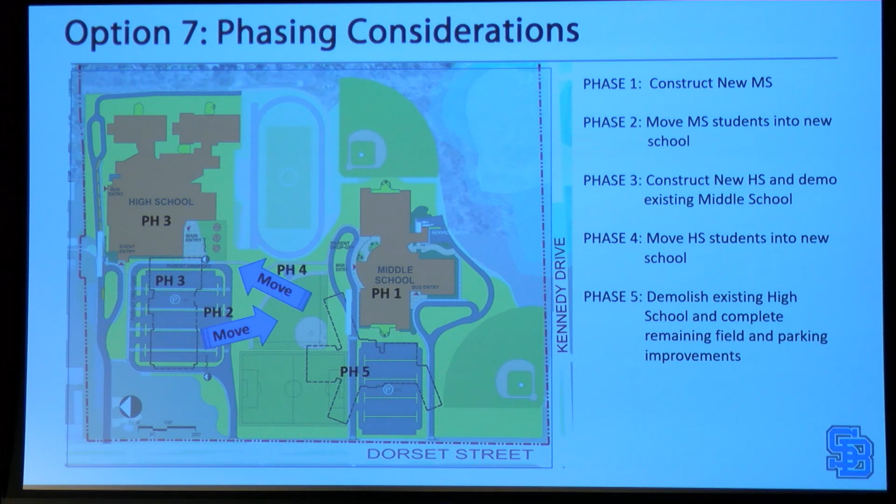Option 8, this is our last option. This is a new middle school, high school combined, so we're not renovating the middle school in this component, this is building that new middle school. So essentially what we did is we took those 2 floor plans that I just showed you for new independent schools, married them together in a way that made a lot of sense to be able to create that autonomy. So this is kind of the dividing line, high school, middle school.

The interesting piece here is we're really trying to maximize operational efficiency. So we have 1 kitchen, whereas those previous options we had 2 kitchens. So we have 1 larger kitchen serving a high school cafeteria and a middle school cafeteria. And that's a key to a middle school, high school, is that you're not sharing those core functions and mixing those age groups together. From a scheduling standpoint, it makes a lot of sense. In this particular one, we have 1 boiler plant, 1 physical plant, so instead of maintaining 2 sets of boilers, you're doing it all at once.

The layout is pretty similar, the geometry again has changed. Classroom wings, high school gym space over here, middle school gym space down here, and the middle school academic wings. 2nd floor follows in a similar fashion.

They're large files.

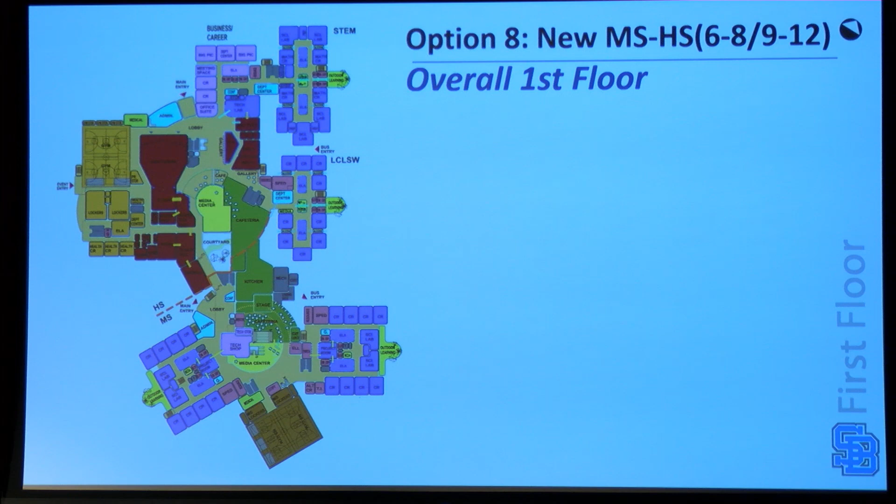2nd floor, that breakdown still remains between the high school and the middle school. Upstairs, the track around the gym space, the auditorium has kind of overlooks down below, really connecting visually the 2 floors. And then the academic wings are laid out. How that fits on the site...

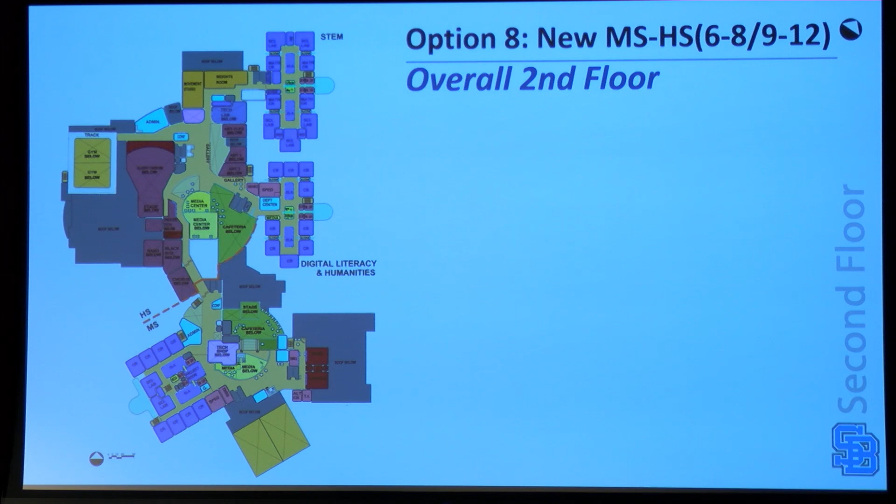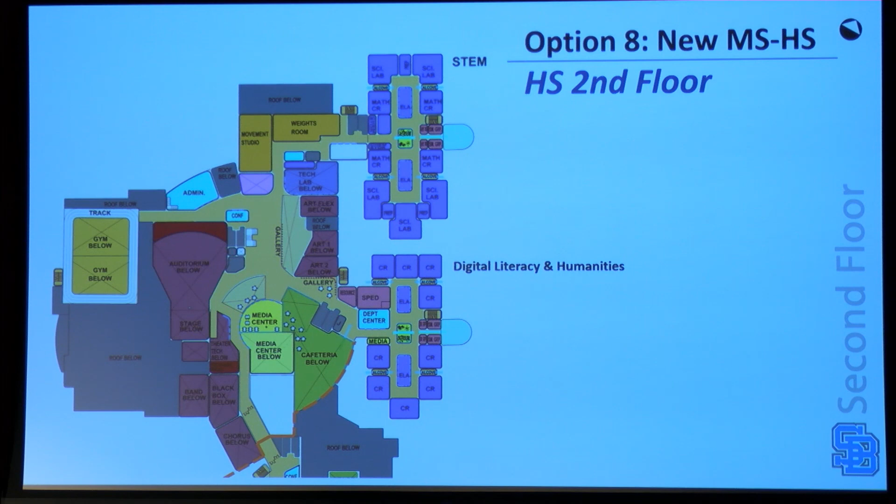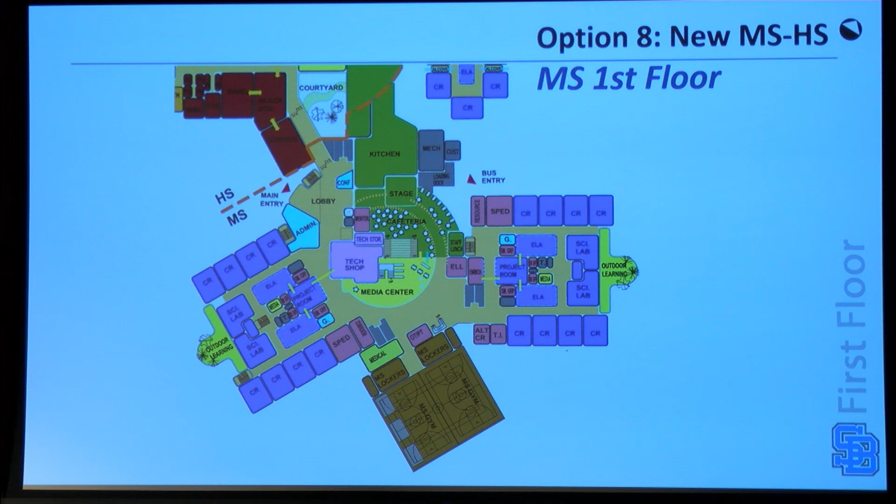You gotta make these files smaller.

And then how this relates on the site. Where we place this, as you can see, this is actually about 365,000 square feet. That was the model program that we used for all of these options. This is a big building, and there wasn't a really good place to fit it in without touching our sacred cow here. So this is actually built over the footprint of the existing high school.

And we're able to stage the phasing here in a couple of different ways. So you could still build the middle school first, while you keep the high school and the existing middle school running. And then we would phase how we connect those two things together.

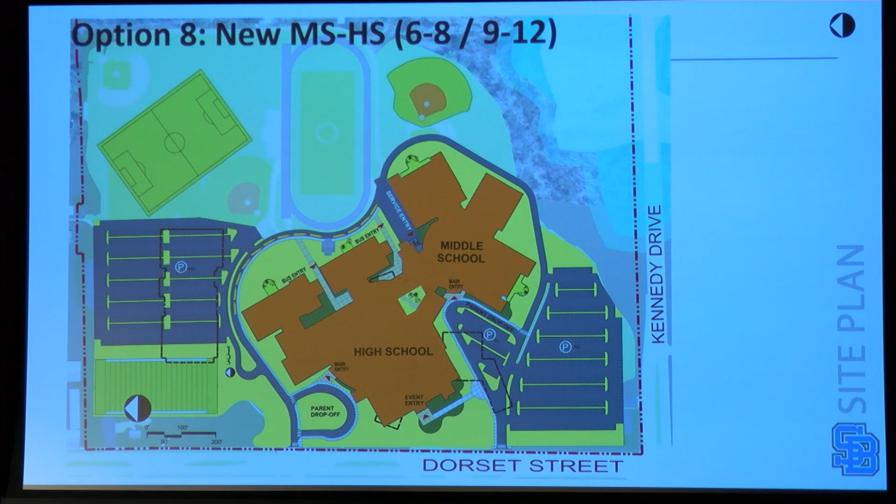So you build that middle school first, move kids from the high school into the old middle school to free up that space, and then you finish the other half of the high school. When that's done, move the kids back to the high school and demolish the middle school.

Parking ends up over on this side. We've got parent drop-off here for the middle school, so they're separate. And then we've got bus drop-off for both places, being able to come all the way around the building. So again, this is phased, but it's pretty clean because we'll be able to do stuff outside of the footprint.

So the next piece I have to talk about is the good news, the cost of all of these things. There's a couple things I wanted to talk about before I show you the slide with the good news.

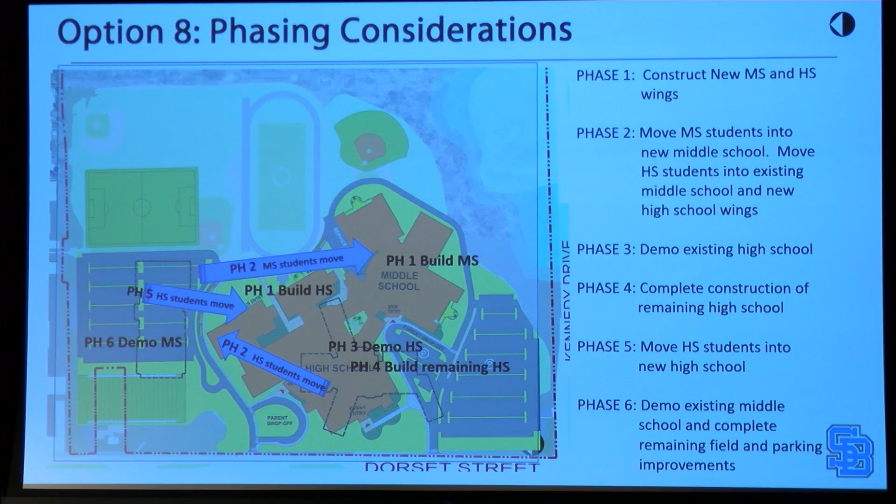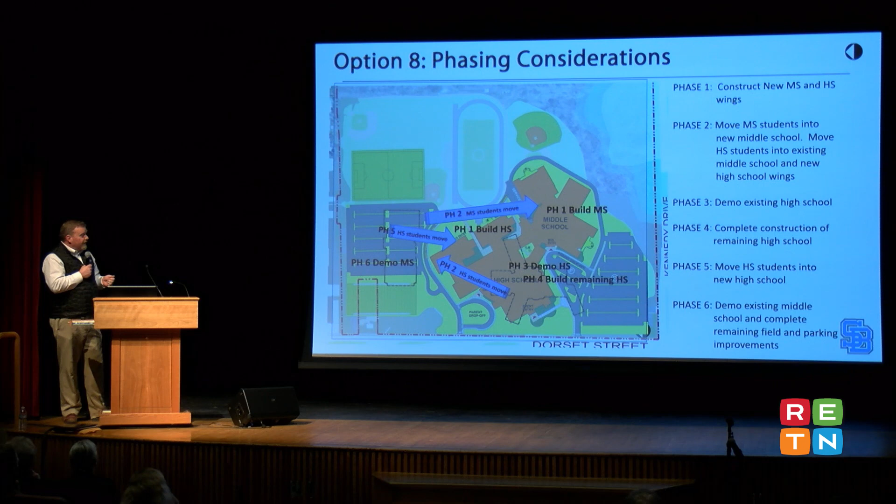We looked at this to try and give you some apples to apples comparisons for all these options. So the assumptions we made were the same assumptions, the same square footage for all the options, the same types of programs. The things that were changing were how we phased it, how much money you're spending on temporary space, and the duration of construction because of the complexity of it. So these are comparative in costs.

Option one was just fixing up what we have, but instead of spreading that out over consecutive years, we bundled it up as a project to extend the life of the building for 50 years. If we did it as a project, that cost is $55 million. These are all project costs, soup to nuts—not just construction, but soft costs, furnishings and equipment, fees and permits, all wrapped into this price. So to get 50-year buildings, apples to apples, option one is considered a project doing it all at once. You could extend that out over a long period of time, but it's just going to get more expensive.

Escalation on construction is anywhere between 3 to 5% a year. 3 to 5% a year on those numbers is a pretty big number.